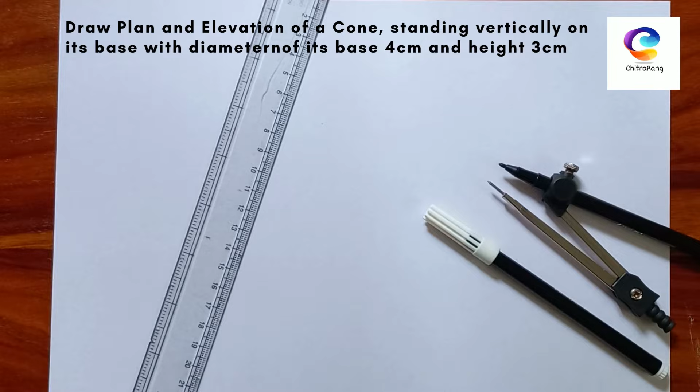Our next solid geometry sum is: draw plan and elevation of a cone standing vertically on its base, with diameter of its base 4 centimeter and height 3 centimeter.

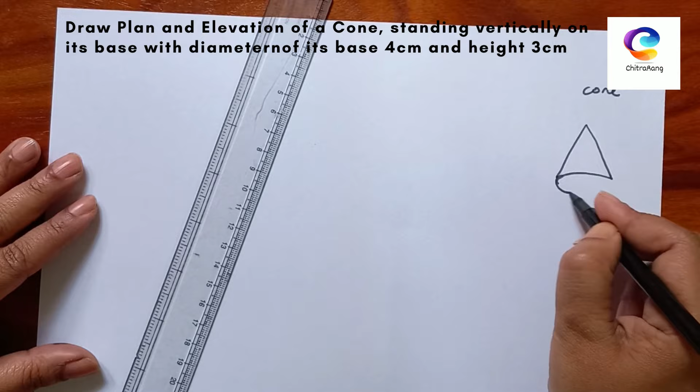It's very simple. So we'll draw the plan and elevation accordingly. So what is given in the question?

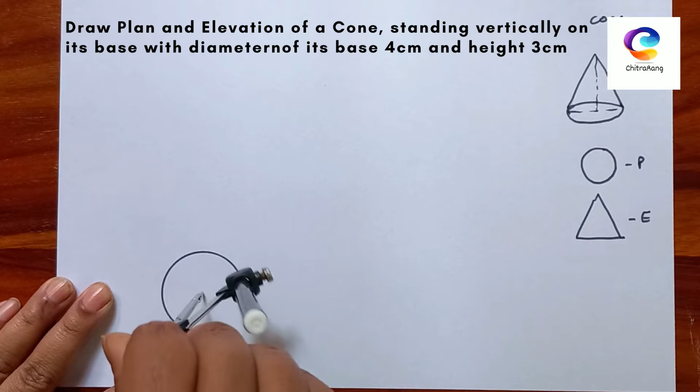Now we'll draw the plan here and on the top side we'll draw the elevation. So here first what will we do? 4 centimeter diameter means we'll draw a circle of 2 centimeter radius.

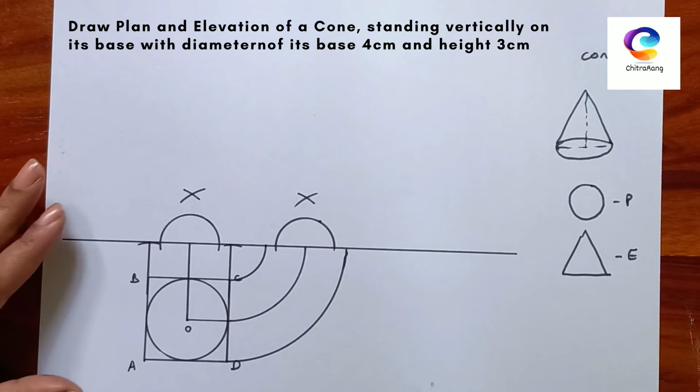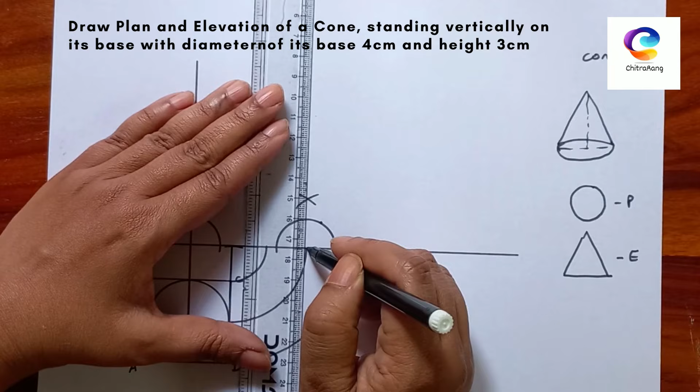Now I will extend this line. Now the height is given as 3 centimeter. How much height is given? 3. In this question you can check, it is given 3 centimeter.

So I will take exactly 3 centimeter with the help of scale and compass, and mark 3 centimeter from this base. Here I will mark 3 centimeter, and I will join this point to this point.

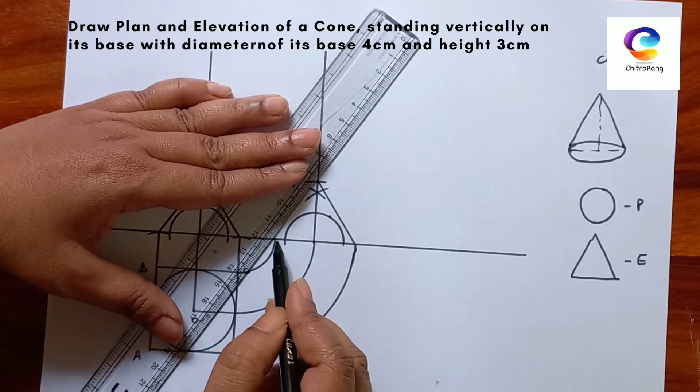Okay, and we have done. So we'll give the names: EFG, PQR.

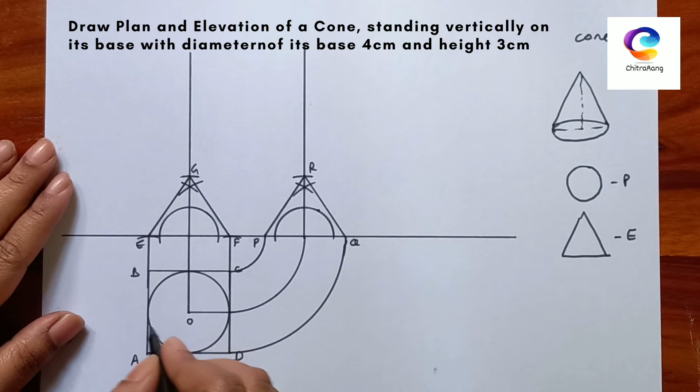So we can write here 'plan' in bracket from above. This one, 'elevation' side.

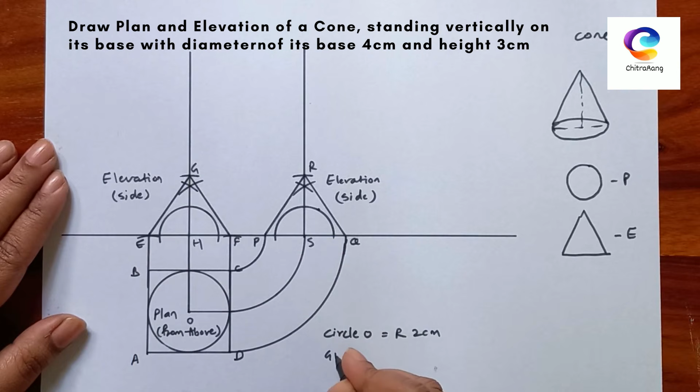You can write here circle O equal to radius 2 centimeter, and you can write GH is equal to RS is equal to 3 centimeter. And we have done with the plan and elevation of a cone.